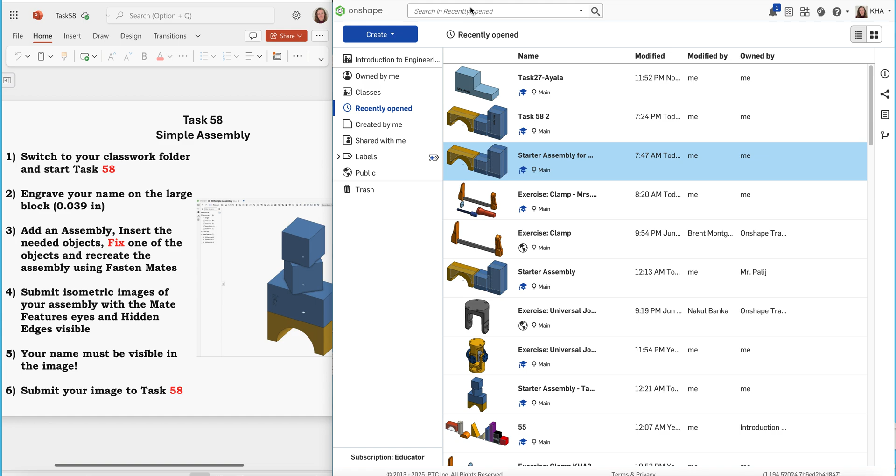It's going to be really interesting. I have sent you a starter file, so you will find it if you hover over the Shared with me tab and look for the file called Starter Assembly. That's what we're going to be working with today.

Before we get into it, let me outline what we're doing. Task 58 is our simple assembly. We are going to save task 58 in our classwork folder. We're going to engrave our name on the large block. We're going to add an assembly, insert the objects that we need, fix one of them, and recreate this model, all these positions, and the way the blocks meet with one another.

Finally, we're going to make sure we submit an image of the assembly with the mate features visible and the hidden edges visible. And of course, your name is always visible.

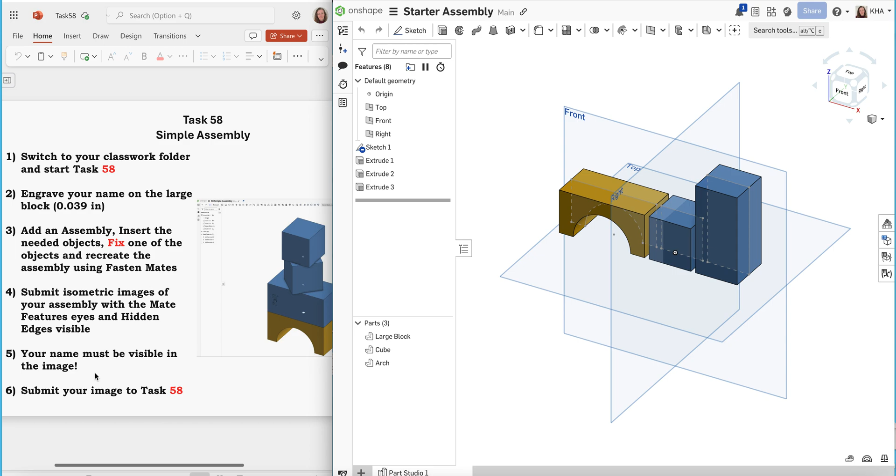So let's get started. When you open this starter assembly file, you want to make sure that you copy the workspace because you don't actually have access to edit this file. You should just be viewing it. So we want to copy the workspace and we are going to name it with your name.

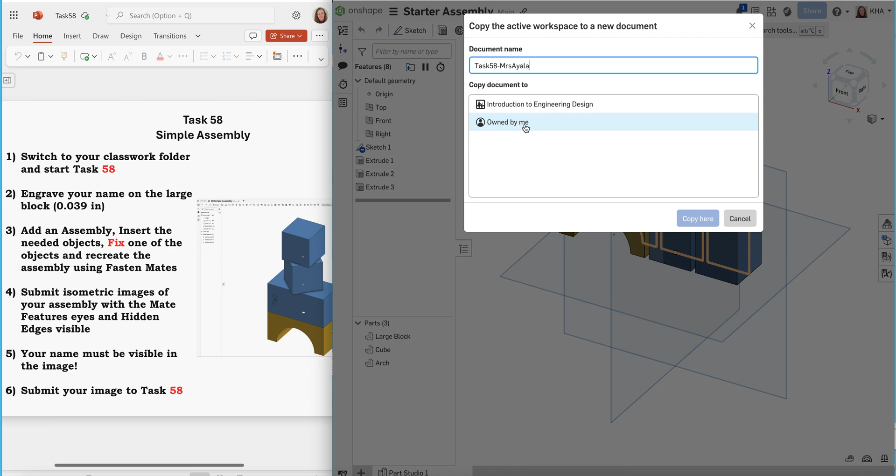I'm going to call mine task 58 Mrs. Ayala. I'm saving it in my Owned by Me classwork folder. You can put yours in your classwork folder. And we'll copy the file. We should see the file name change here. That's good, I think we're ready.

Before we get into creating our assembly, you might want to make sure that you have a mouse. When you're working with assemblies, I think it's especially helpful to use a mouse because there are some buttons that make your life a lot easier than just using a trackpad. So you might want to pause the video and go get a mouse and come back. Anyway, I'm going to go on.

We have copied our workspace. We are going to start a new assembly. There is a plus sign in the lower left corner of your OnShape window, and that plus sign is where we can insert a new tab. We are going to create assembly here. When I click on create assembly, I should see a new tab open over here.

And right now our assembly area is blank. This little dot is the origin. This sidebar is going to show all of the parts that we're going to bring into the assembly. And this is our toolbar.

The tools are a little bit different than what we've been using in the sketching and part studio, where we can extrude things. We're going to learn all about it. But first, I'm going to just rename my tab here. I'll call it task 58 assembly.

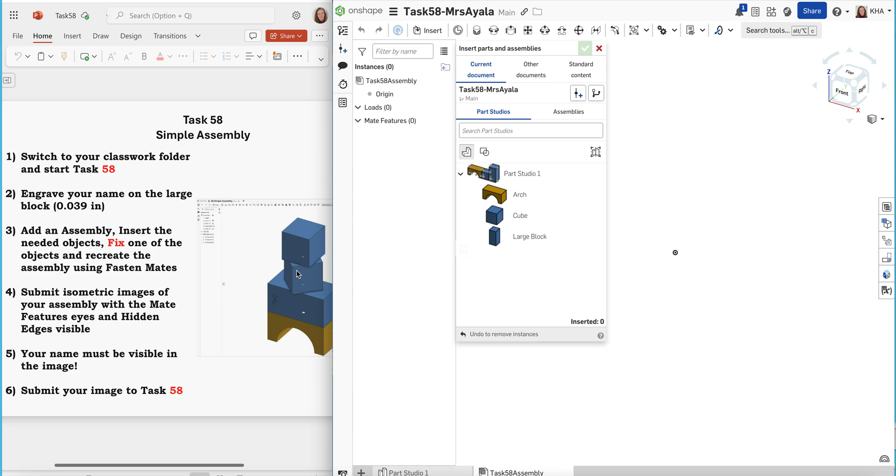And I might do that, but I see I need 1, 2, 3, 4 blocks. I actually need 2 of the squares. So I think I'm just going to go ahead and click on every individual piece and bring them in that way. The arch, the cube, we need 2 of, and then 1 large block.

Okay, so that should be everything. And if I needed to, I could go back and insert more parts, but I'm going to leave it at that. Now I'm going to use my mouse to right-click on the white graphics area and choose Zoom to Fit. That helps me to zoom out just enough.

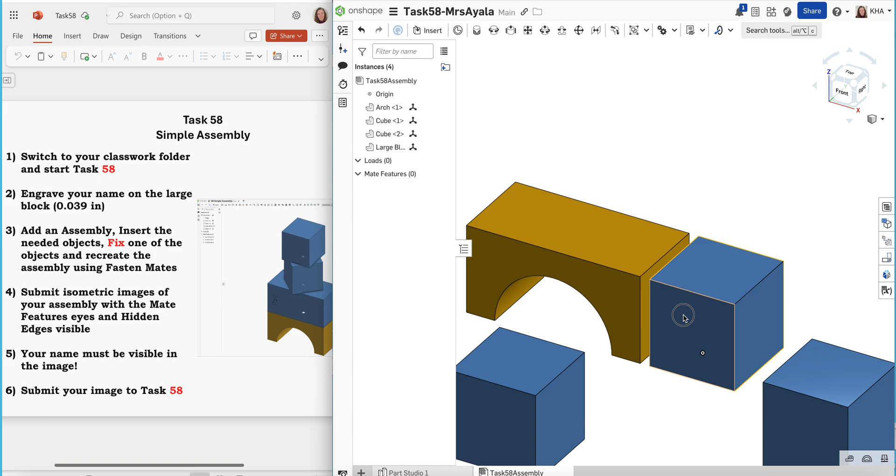Okay, so now we want to think about how we're going to start. The first block, we're going to build from the bottom and make our way up. And one practice that I like to do, and you might remember this from the OnShape video, is fixing one object at the origin, kind of your starter point. So I'm just moving the other blocks away from the origin, one up here, so that I have plenty of space for my bottommost block, this arch, to be on the origin.

Now that it's there, I'm going to right click on this block, and I'm going to choose... what did I see? I want to see move to origin. Why don't I see it? Oh, I know, I think I need that.

I need to click on this circle here and choose move to origin. So to review, I clicked on my arch - I could click on it here, or in my sidebar where the arch instance is shown. This is the manipulator that lets you move things up and down, right, left, back to front. I'm clicking on the circle at the center of this manipulator, right clicking on it, and there I'll choose move to origin.

Now that it's here, I'm going to have it stay at the origin by fixing this block in place. When I right click, I think I need to click off of it first. Let me click on the graphics in the back. Now let me right click on the block and choose fix. That means this block is going to be fixed at the origin - I can't move it anymore, the way I can move around the other blocks if I drag them.

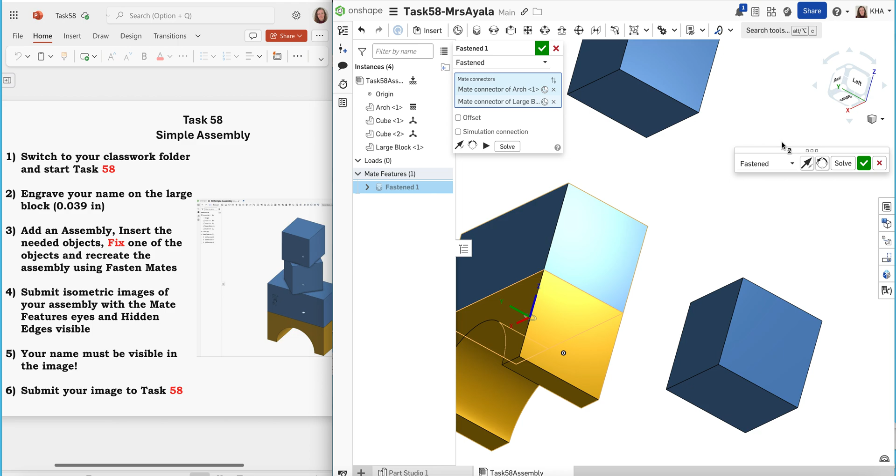So sometimes if you find that your block is doing the mirror reflection of what you want, you can just try doing the same thing on the other side. That worked well for us - we have our blocks lined up just like in the picture here.

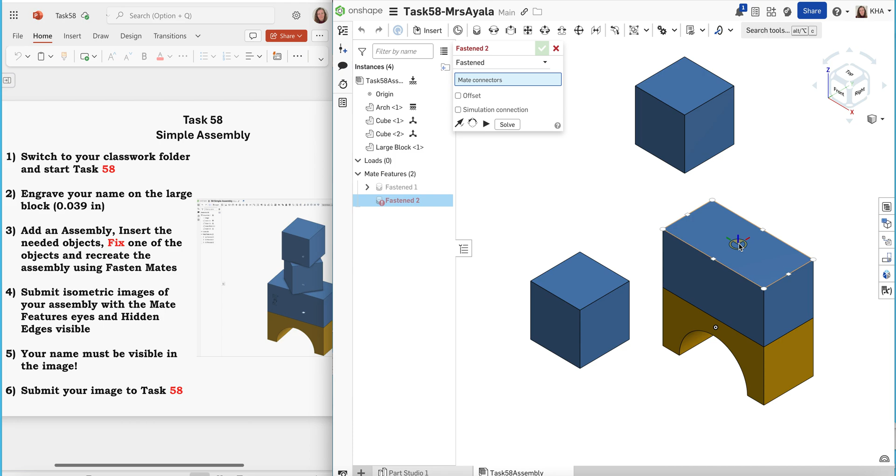Next, we need to put a cube on top of this rectangular prism. So we're again going to use our Fastened Mate tool, and we'll select the top of this rectangle, finding the center point with the mate connector point. I can see mate connector of large block is highlighted there. Now I'm actually going to get the bottom side of the block.

I can get there by using, I can do two things - I can use my view cube arrows, or I can actually use the right click button on my mouse to make the whole screen rotate as I move around. So that gets me underneath the blocks.

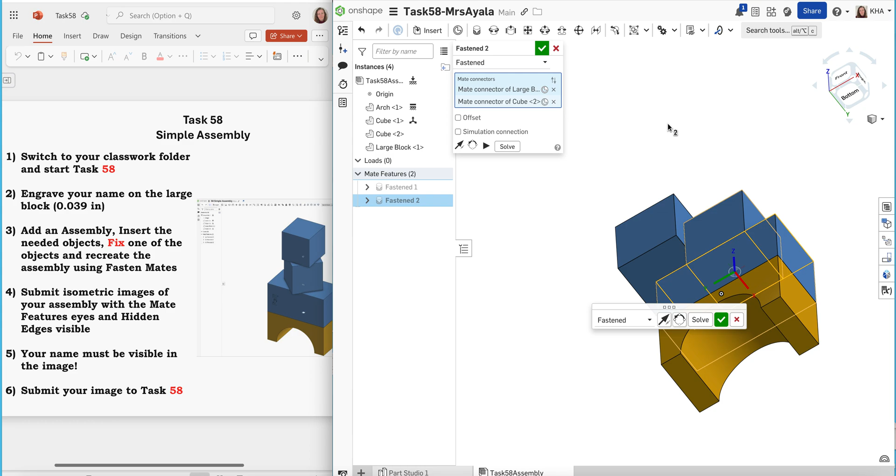I need to get the bottom of this cube, and that should move it into place. I can right click on the background here. I should be able to choose - I think I can't because two things are selected. Let me agree, and now I can choose isometric - that's a quick way to go back to the isometric view.

So this looks pretty good - we have the right order, but you may notice there's a difference. We need to change the orientation of this third block. Let me go back to our second fastening. You might notice these are all of the mates we've used so far - here's where we joined the arch block at the bottom with the larger block, and this Fastened 2 is where we just joined the wide, large rectangular prism with the cube. So I'm going to right click on Fastened 2 and choose edit.

There's a tool I can use here called an offset. An offset is where you shift something either by moving it a certain distance or rotating it. In our case, as you may have guessed, we want to rotate. So we're going to rotate about which axis - if we're not sure, we can look at the view cube. Here's the x-axis, here's the z-axis, the y-axis would be this way. So we want to rotate, as you can kind of see, about the z-axis, about this axis right here.

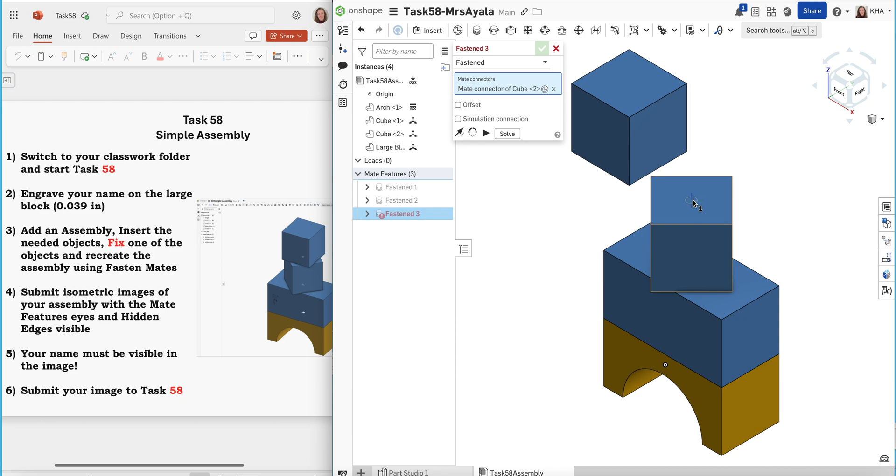Finally, we've got to join 2 more blocks, the 2 cubes. So let's do one more fasten mate. We'll find a mate connector in the middle of the cube here, and another mate connector using right click in the bottom of that cube. Once again, you can see already we're going to need another offset.

We've got to rotate around the Z axis. So let's offset Z. You can, by the way, notice there's a red line, a red arrow.

Here next to the x-axis, and a red arrow here to show where the x-axis is in our assembly. There's also another red line here to show how the x-axis falls on the view cube. Same thing with the z-axis. We have a blue line for z in this list, a blue line in the assembly, and a blue line on the view cube. And then I can see a green line for y, a green line for y, and I guess the y is hidden here by the view cube, but I bet it would be green, right?

So we're rotating about the z-axis because that's the one that runs up and down here. And we're going to turn again 45 degrees like we did before. All right, that looks good.

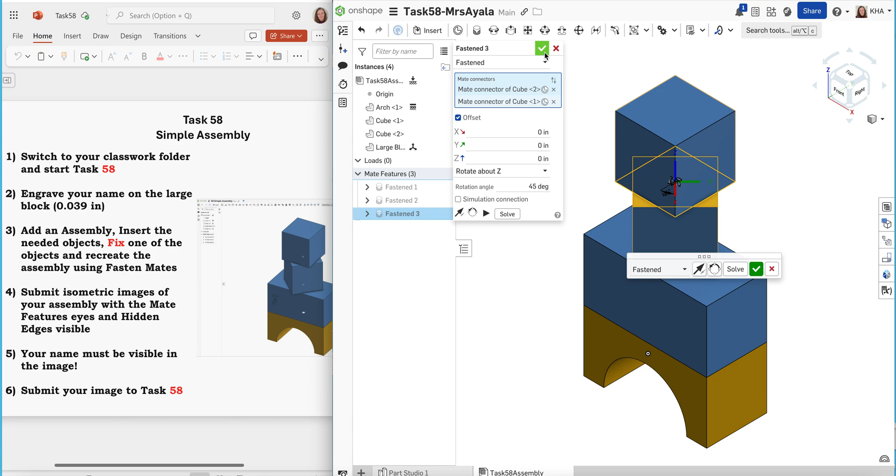So we have fulfilled everything in this list except we did not do number 2. We did not engrave our name on the large block. And I'm kind of glad we're doing it at this point. I want to show you we can actually engrave if we go to the Part Studio.

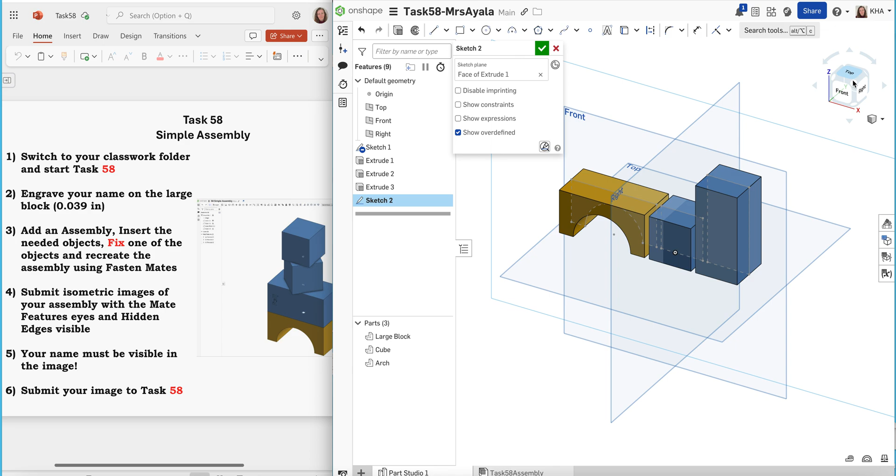Which is the interface that we have mostly been using since November. We want to add a name, so I'm going to put my name on the large block by creating a new sketch and choosing the face that I want to sketch on. And then I'm going to go ahead and find that front. I'm going to add my name to the block.

This is Ayala. And we can actually choose... where is it? I wanted to choose to rotate. Here. Oh yeah, transform.

So let's transform this name. There we go. So I can use my arrows here to help me transform. I want to turn it 90 degrees. And I'm going to kind of move it into place.

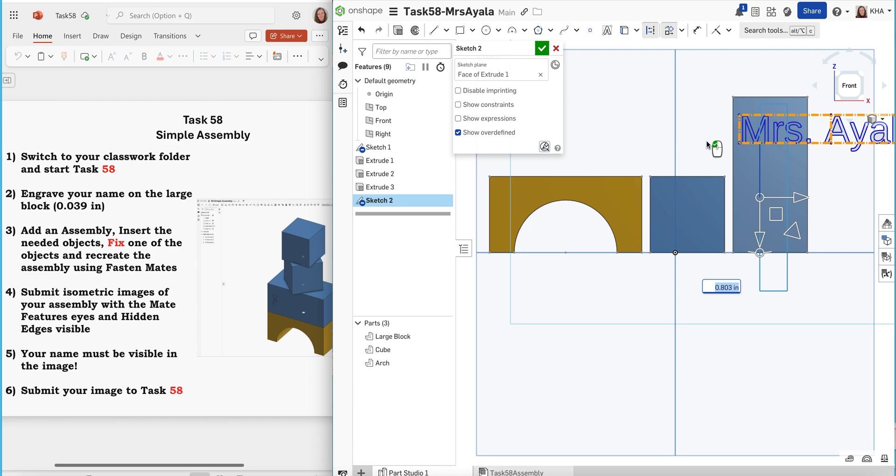Using these arrows. All right, I think I will accept by, see how I see a mouse graphic next to my arrow here, and with a green check mark on the left click button, I'm going to left click, accept. Now I've rotated my name.

And oh, by the way, I rotated my name because this block is in that position over here. If you don't want to do that rotating and your name is going sideways, that's okay. As long as your name is on the block, it's going to be okay. But I think I like to rotate mine.

I'm going to now use the dimension tool to define its position. This is one. I'm going to change the size so it is smaller and it actually fits within the dimensions of the block.

Great. So I think I will accept sketch 2. I will do an extrude on sketch 2. I'm going to make it go in this direction. 0.1, not too much.

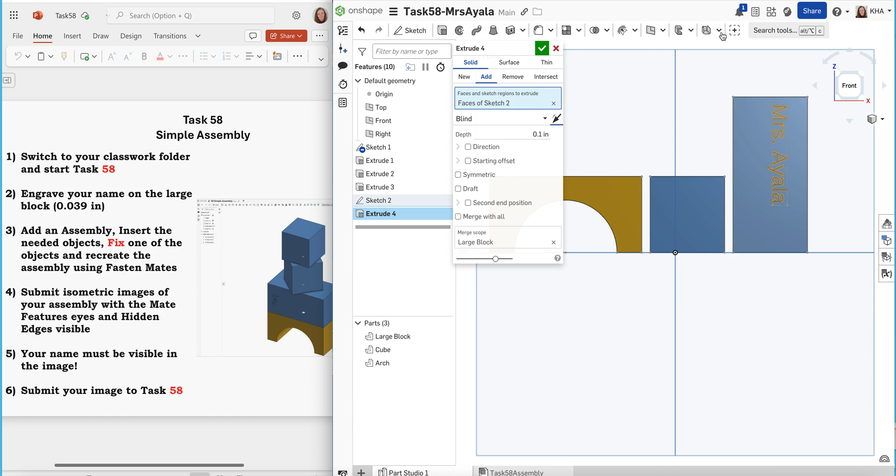Oh, that looks better. Okay. Cool. So there's my name. And now that we have modified the Part Studio, it should also modify the assembly. Yep, there's my name. Great.

So now that we have added a name here, we can follow through. When we submit, we want to have the mate features visible with the eyes and the hidden edges visible. So let me show you how to do that.

These are our mate features. And when it says mate features eyes, that means click on the eye so that the mate feature is showing. So I'm clicking here, I'm clicking here, and I'm clicking here. This is just a way so that at a glance, someone can look at your image and see that you have been using the Fastened Mates connector between your blocks.

And finally, we're going to have our edges visible. That is under the view cube here. We can choose, instead of hidden edges removed, we're going to change that feature to hidden edges visible. So you should see all of the lines that are in the back or on the left side. Now they're visible. Okay, I think we have done it.